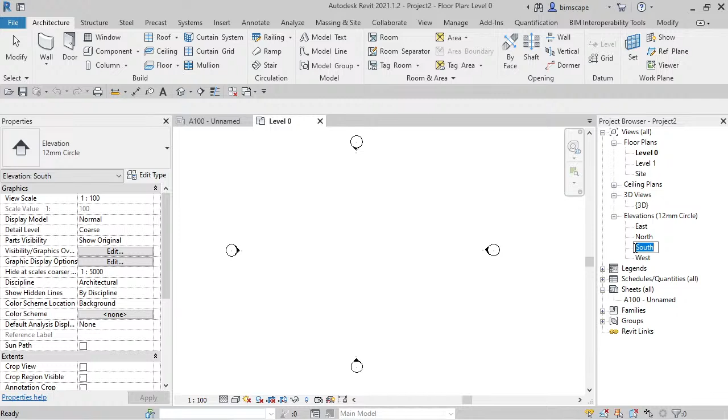Obviously, being in the UK, I'm working in metric units, so apologies if it's a different unit you're used to. A lot of people have asked for imperial units in the courses. It's something I definitely would consider. You can appreciate it's quite a lot of work to do a second set of videos with different units and for the PDF ebooks, but I'm definitely not ruling it out. It's probably not quite a priority at the moment, but I know many people around the world are working in different units than I am.

So let's - I've got to keep remembering to check down at the chat box. 1 p.m., just short notice. Oh, apologies, Lou. Oh, hello, we got someone from France. Fantastic.

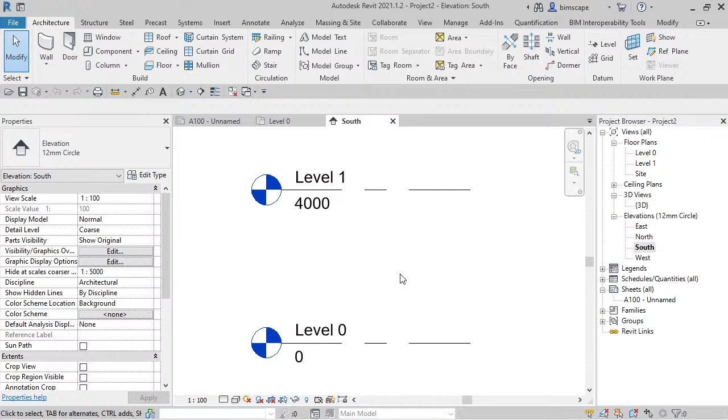Right, okay, so levels - absolutely crucial in Revit. You can see here in the Autodesk template that they give you 2 levels to get you going, to get you started. So you've got something in there, but you're almost certainly going to want to add additional levels.

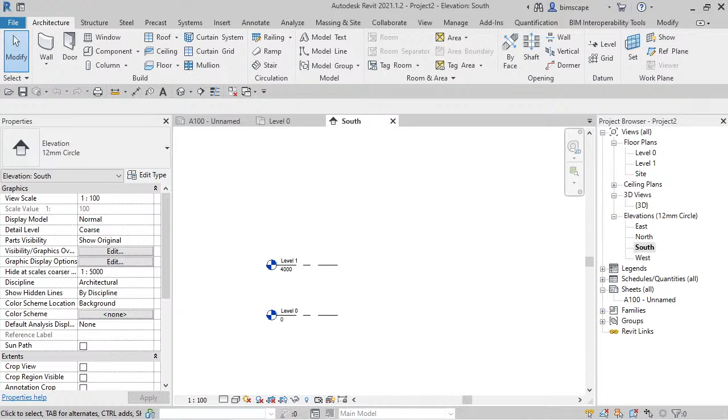Oh, thanks, Zane. Brilliant. Enjoy. I really appreciate the feedback.

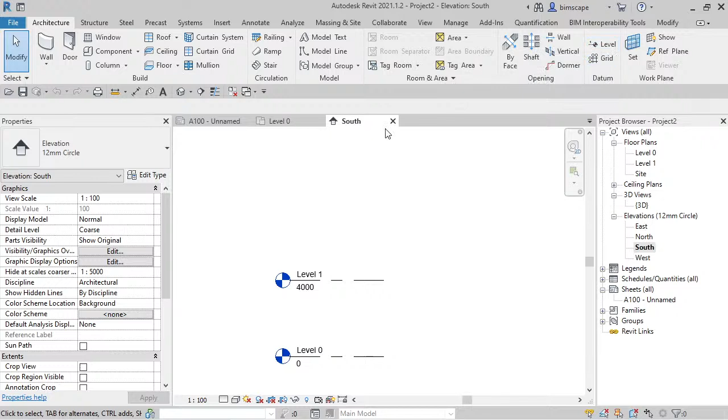Now I'll just say again, you do have to be in a side-on view, so either an elevation or a section, because levels are always horizontal. So if you're in a plan view, you're not going to be able to see where you're defining that level, and that level menu we saw before would be grayed out - it wouldn't allow you to do it.

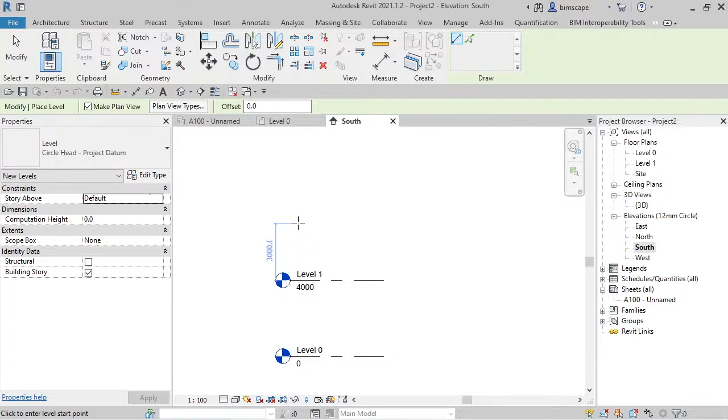So let's go and add an extra level. Notice how the alignment line helps you set these out. Now what you're seeing here is just the graphical aspect of a level. The datum we create, the plane, is infinite in its operation, so we can place objects anywhere at this height - it's not limited to just this line. This is just a graphical representation.

So you can imagine if our elevations here, we might find it useful to have these at the side to see the different heights, or we could turn off the visibility of those, but the actual plane, the datum, would still be in there.

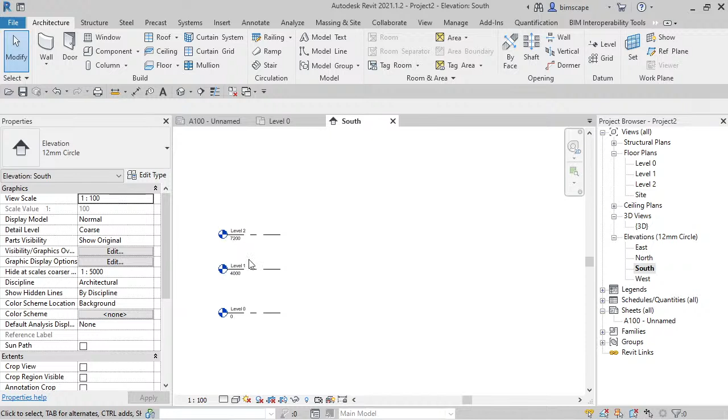Okay, so let's go through the aspects of this. We've got the height there. Now that is based on the project coordinate system - the Z coordinate - so we can select a level and just click on that value, and put another one in, type it directly in.

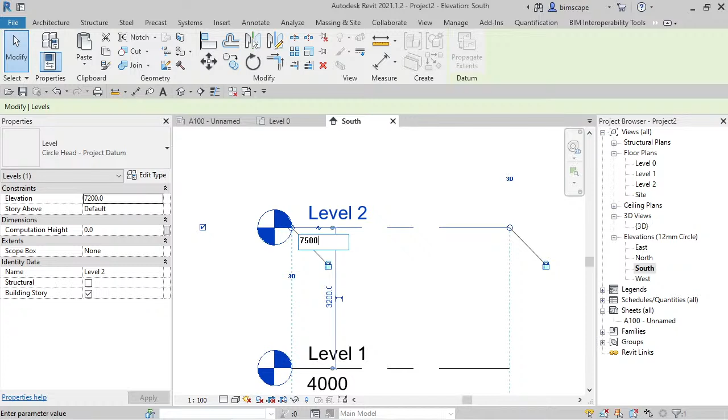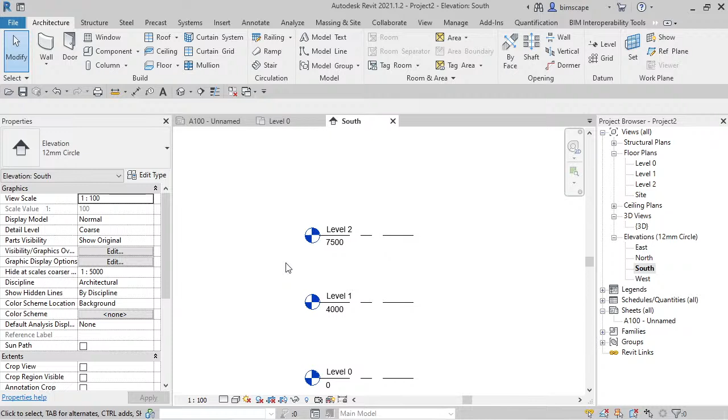That goes up there. Above the line we've got the level name, so you can see that Revit has automatically named these in sequence as we've added additional ones in. Thing to note there, it does name them just in the order you put them in, not necessarily in the height order. So if you go and add another level down here, it would be level 3 - it wouldn't know to make it 1.5 or anything like that. It's just the order you put them in.

I'm just going to keep checking the chat box. So, 10-story building, how to apply general notes to multi-floors.

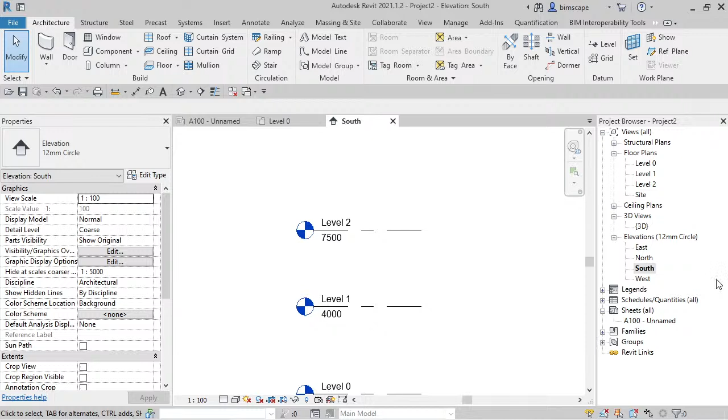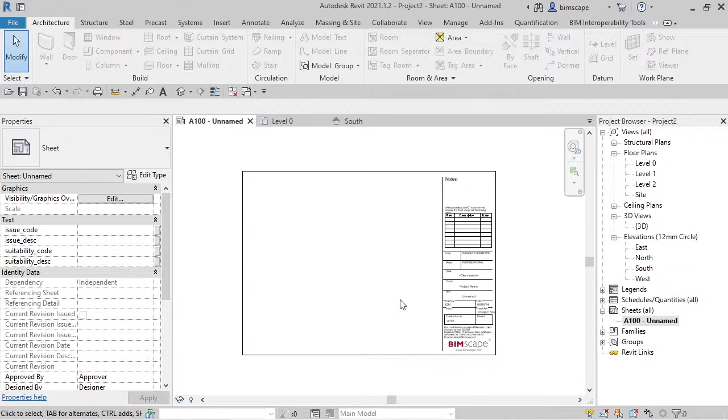So you're not typing this - right Ken, that's going to be a legend view. I'm imagining what you mean there when you say notes onto a sheet. So let's flick to a sheet view - there's my sheet, a little A3 sheet. I'm imagining what you mean is if you've dragged different floor plans onto different sheets, and you want a standard set of notes - I'm assuming that's what you mean - then that would be a legend view. Legend views, it's sort of obvious in the title really, it's for legends and standardized notes, and it's one of the few view types that you can actually put the same one onto multiple sheets. It's fine with jumping around with questions or whatever - that's the purpose of this live session, exactly what I intended it for. People can just ask what they need.

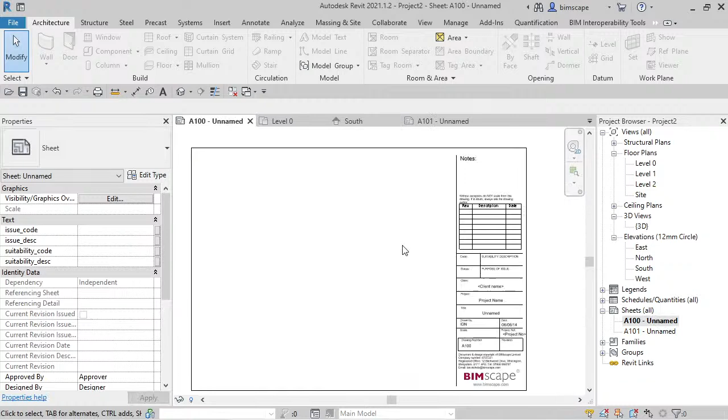So, for example, if I drag that level 0 floor plan and put it on there, I know there's no building on, but it's allowed us to put the view on. If we go to the second sheet and try and do that again with the level 0 floor plan, we get a warning it already exists and it's already on sheet A100.

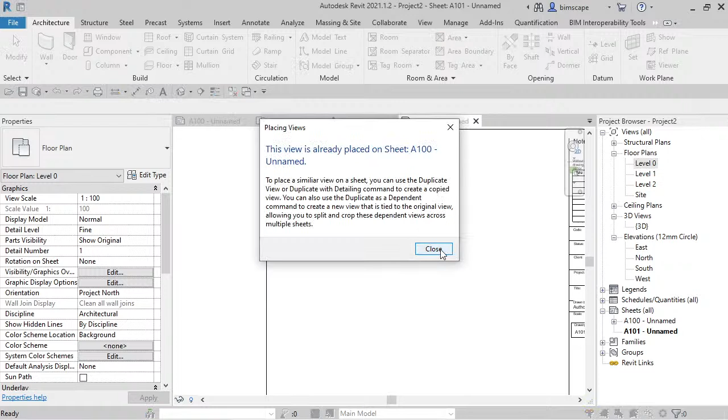That is because when Revit starts to auto-populate the markers for elevations like this and sections, so all the reference bubbles, it only makes sense if you've got the corresponding plan on one sheet and its elevation or its section on another, so it can sort of cross-reference between the two. If you could put the same plan on multiple sheets, how would a ref on a section, for example, know which other sheet to refer to?

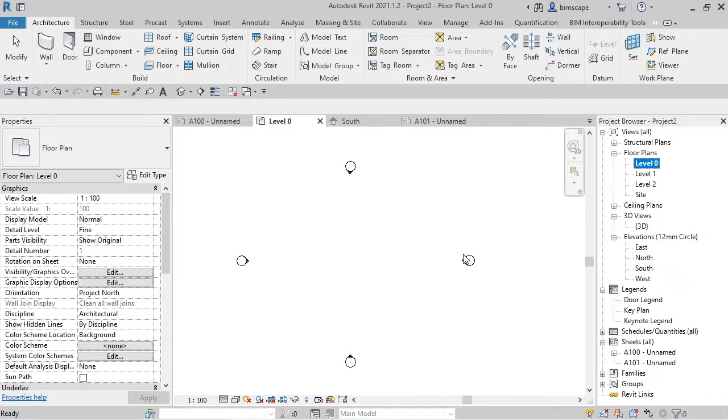So going back to your legend views, because it's a standard note, you can actually, in fact we've got it there, I've got some legends, you can drag those onto as many different sheets as you need. So that's where you'd create it. Let's have a look down here. Things like the wall construction with a leader. Oh right, okay. Be view specific 2D. I'd have thought the wall construct. Right, now that's a really good point. The wall construction. Let's have a look at this.

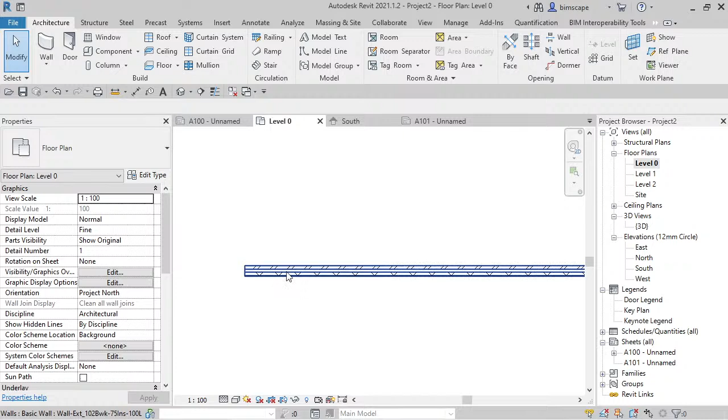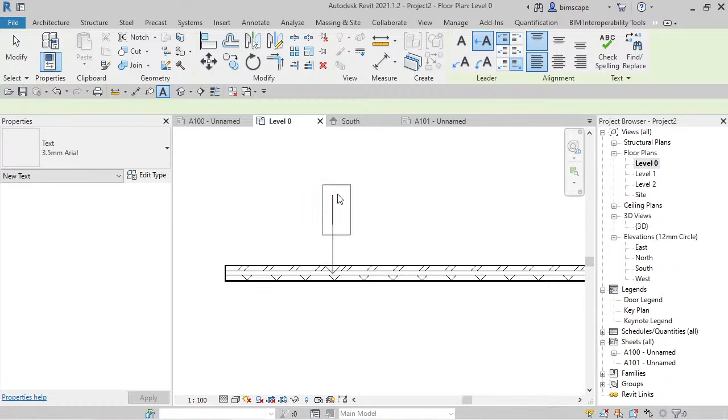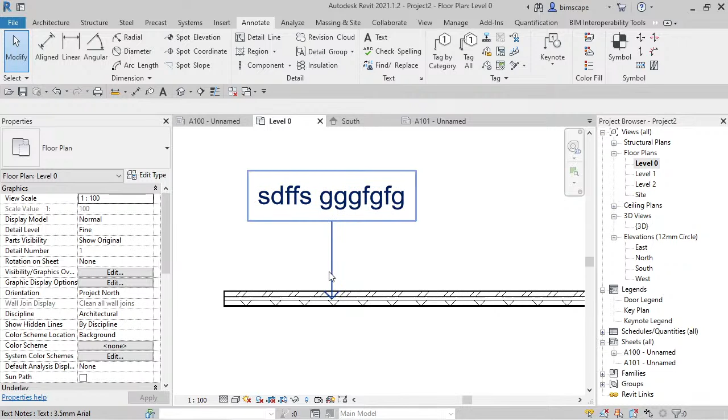No, yeah, I think you've beat me to it there, Ken. If it's to do with a wall construction or any element properties, then you need to be having a tag to pull that data out of there. What you do not want to be doing is going to annotate text. I mean, if you come from AutoCAD, you're going to be tempted to do that. Forget the garbage I'm putting in here. It could be anything, but you don't want to just be putting a piece of text with an arrow pointing to an element, because in Revit this is just dumb 2D text. It doesn't have any actual relationship in the database with what it's pointing towards.

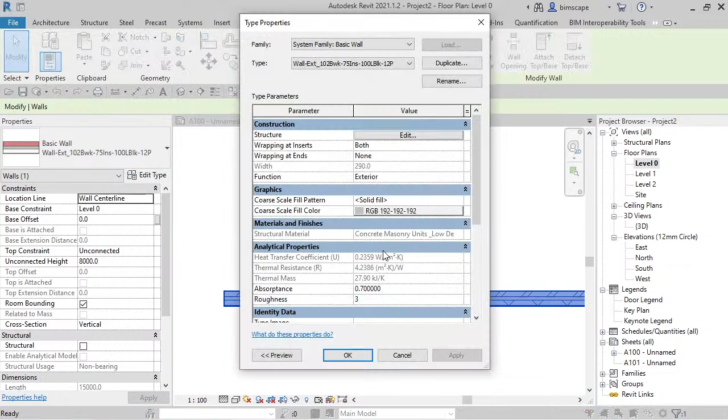What you need to be doing is selecting your element, and you need to be populating the project information, or that element information, in here, probably down at this level, the type parameters. So we're really talking about the whole BIM, building up a building information model where the information, so in what Ken was asking about, the build up of the wall, the layers, the thicknesses, etc., they're contained within the element itself, and then in Revit we use tags to actually pull that information out and make a little note next to it.

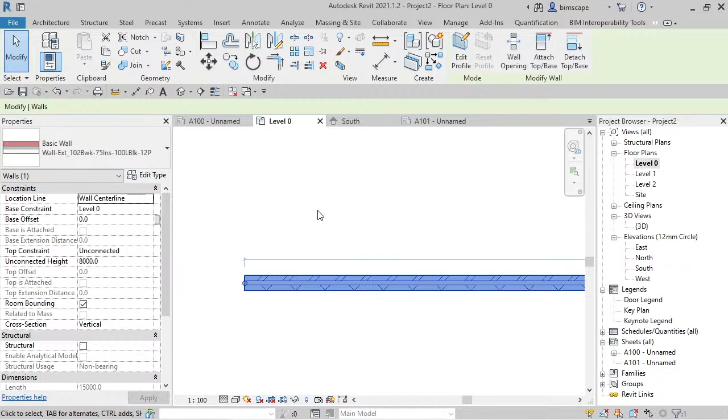Let's have a look. So I'm just keeping an eye on the chat box on a different screen here. So yeah, we'd go to tag by category. Now we've got a question mark there because this standard tag for this wall is obviously pointing at a parameter in that element that doesn't have any information against it at the moment. But the real power of tags is that you can configure them to display any information about an element that you need. So let's just go back to that piece of wall.

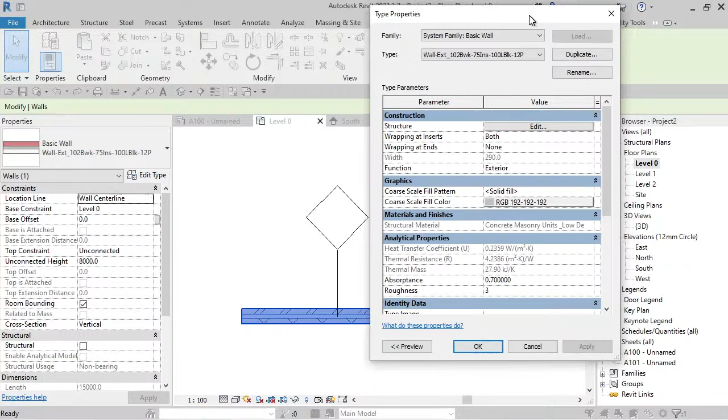Edit type. So in fact, if I place this over here, we've got two levels, a hierarchy of parameters to do with any element in Revit. We've got the instance parameters here. So for that particular piece of wall that I've selected, those parameters are particular just to that one selected wall. So we could have a whole building envelope, all of the same wall type, and we can change any of these here for just that one piece of wall. However, the type properties in here, anything we change there will change all the elements of that wall type in the model, regardless of whether I've got them selected or not. So just be careful of that.

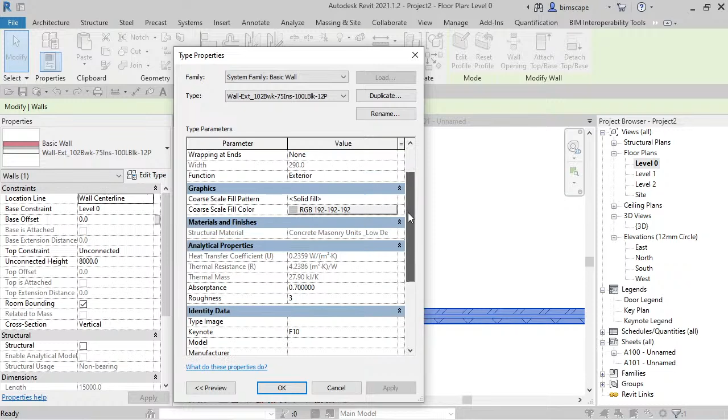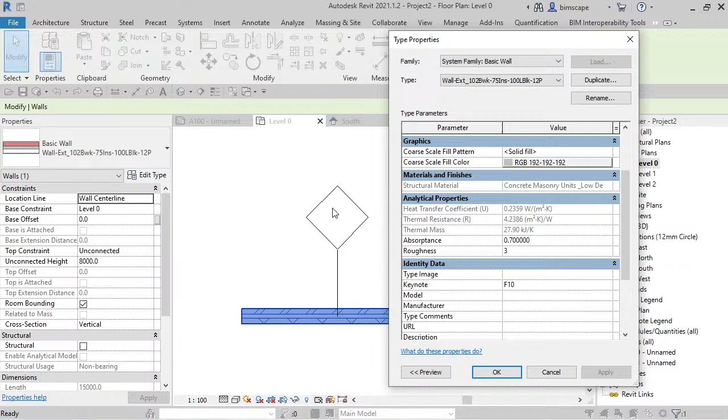But the reason I brought that up here is any of those properties there, or the ones listed here, you can set your tag to pull out those values. So if you wanted, I don't know, a drawing showing, well, any of this really, the manufacturer, or some comments or a description, you can configure the tag to drill down and pull out any values it's found. And that's why we're getting that question mark. This is pointing at one of these which doesn't have any information in at the moment. But you can go and change that yourself.

Let's have a look at exactly how it actually creates some parameters in it.

same as if you used a pen or pencil. Well, in Revit, the main mindset jump is that, for the greater part, you're modelling your design, and you are letting the software produce the drawings from it. So if you start with that sort of mindset, you're building up this 3D model, you're populating those different elements with the information about them, and then you're using the tools in Revit to automatically generate floor plans, sections, 3Ds, and to add notes from the information that you've embedded against the different elements.

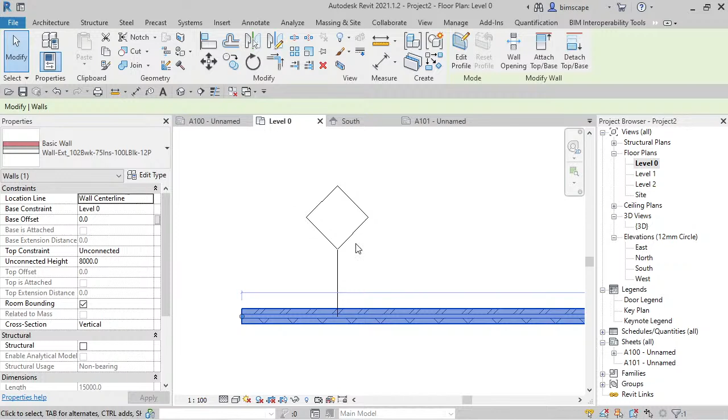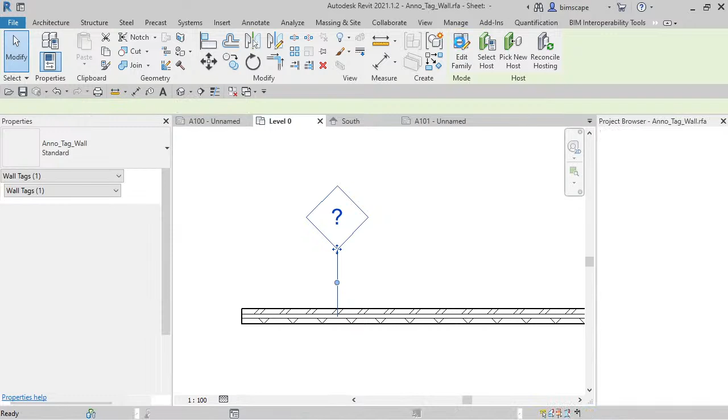Okay, so I won't spend too long on it, but just to show you editing those tags. Now, tags are a family, just like all the other component families in Revit, which means they can be created and edited with the family editor. So, edit family. This opens up the family editor. You might have come across this part of the program either intentionally or unintentionally. If you double click on a component family like a door or window, it will open up the family editor for editing.

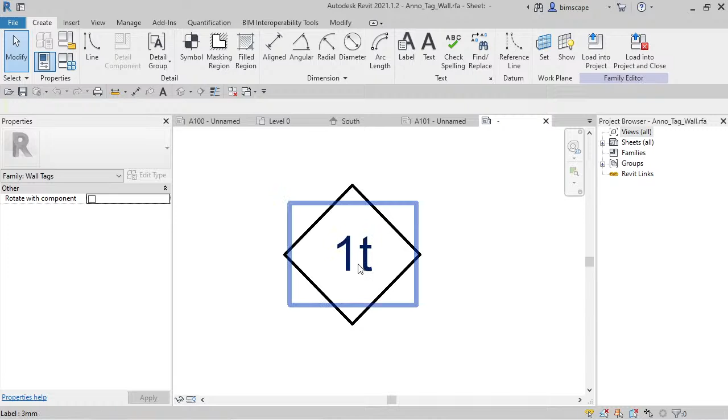So if I pick the label there, this is where, in the case of a tag, you set what data is pulled out. So there's that list of parameters. Now, because it's a wall tag that we're editing, you can see that's selected there, so the parameters are only from the wall category. You can see there the type mark; if you feel that's a unique reference for that type of wall, that's what this tag is set to display.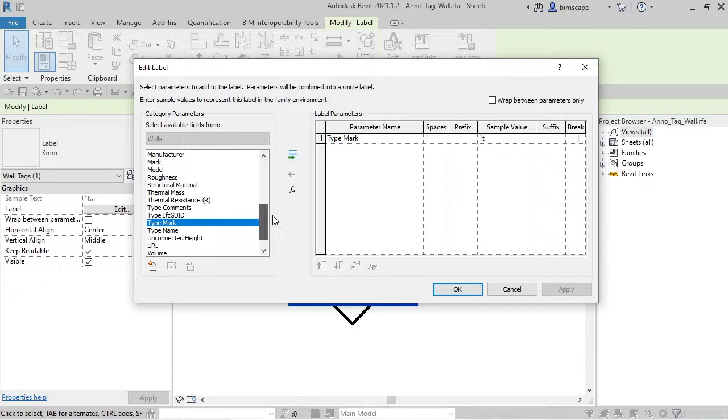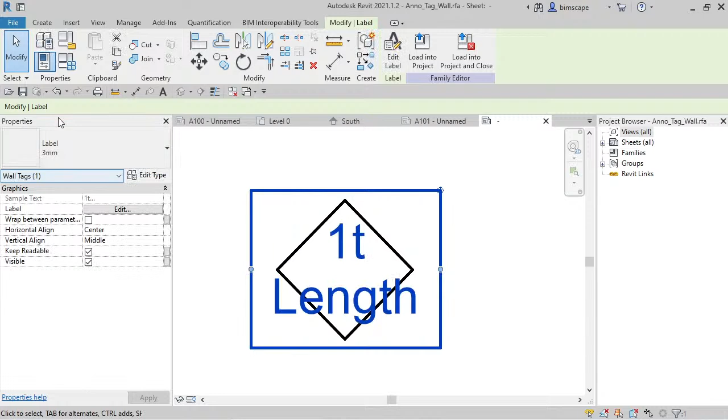But there's nothing stopping you. Let's have a look. Let's choose something. Length. Add that in as well. And you can have more than one property or parameter in the tag at the same time. Put that break on so it starts a new line. Just widen that a little bit. Now, obviously, if I was doing this for real, we'd change the box and all that sort of stuff. But just to give you an idea.

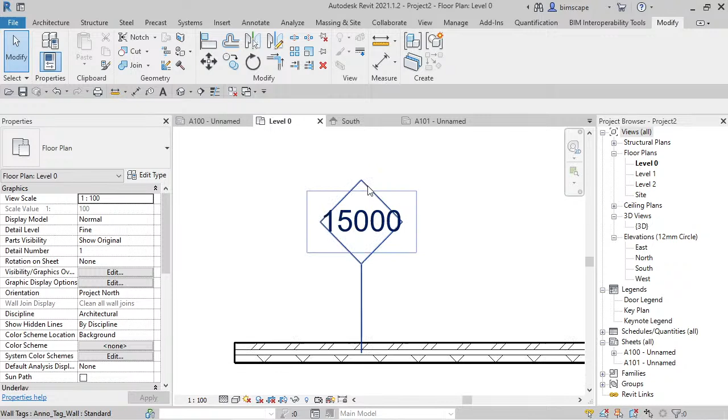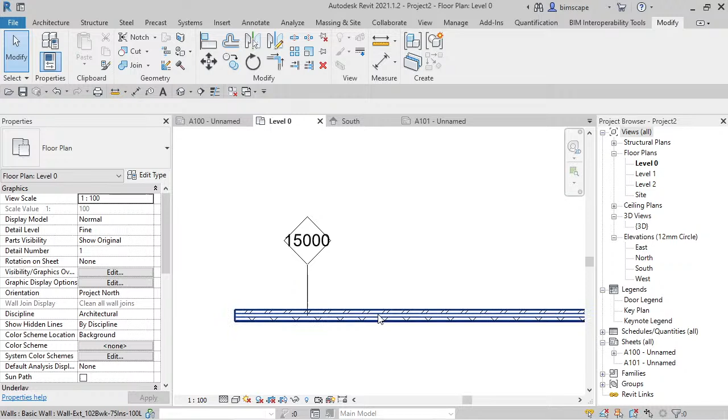Won't save it. We'll overwrite the existing one. There you go. It's still not finding the type mark because we haven't added it in, but it is displaying the length. So that might be really useful to somebody. You've got a drawing which has got all the lengths of walls on. I know you could normally dimension it, but the principle I'm trying to get across is any of those properties, instead of you, like in AutoCAD, measuring this and putting a little text note on.

So why is that important? Well, exactly this reason. You go and change the length of the wall, it updates instantly. If that was a piece of text, obviously we've got to go and make sure everything's coordinated. So a huge part of the power in Revit is that it keeps a lot of your information coordinated, so the plans always match the sections, the elevations, etc.

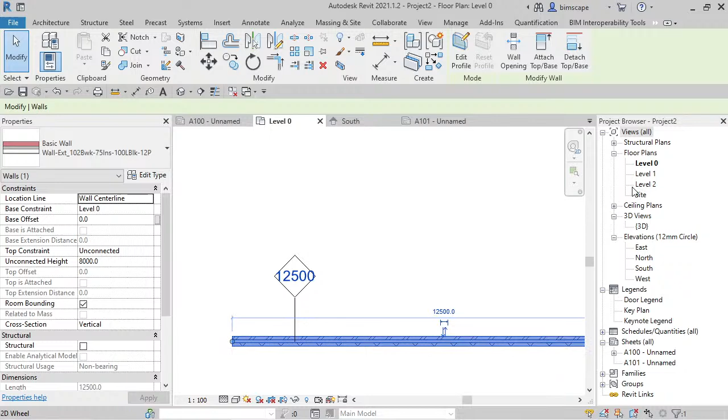Okay, where were we? We were on levels, weren't we? Let's go back here. So we've got a few levels in our project. You should be using levels as far as possible to control the height of elements.

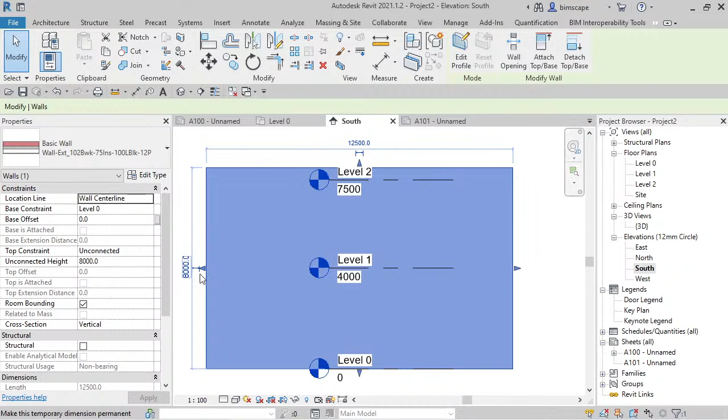So for example, walls. If we take this wall, it's starting at level 0. So if we look over at its properties, base constraint, level 0, and the height of it, top constraint, currently that's set to unconnected. That term unconnected just means it's not controlled by a level or anything else like a roof it might be attached to. So it's unconnected, and if it is unconnected, as it is here, we have to tell it how high it is, else Revit's not going to be able to display it. So that's what the unconnected height parameter is below it.

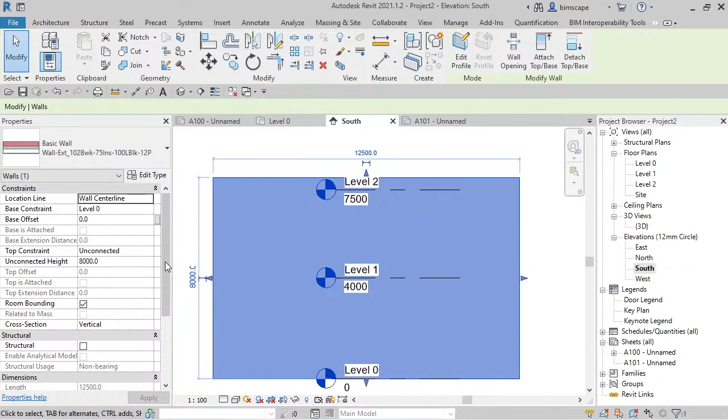And I would suggest that you minimize the use of unconnected heights. Again, it's the same sort of debate as we just saw using dumb text. If you have unconnected heights, so you've manually gone around and set the heights for all your walls, if you need to make a global change, so all your envelope of your building needs to come down by a couple of hundred mil, you've got to select all those walls and go in the properties and change it here.

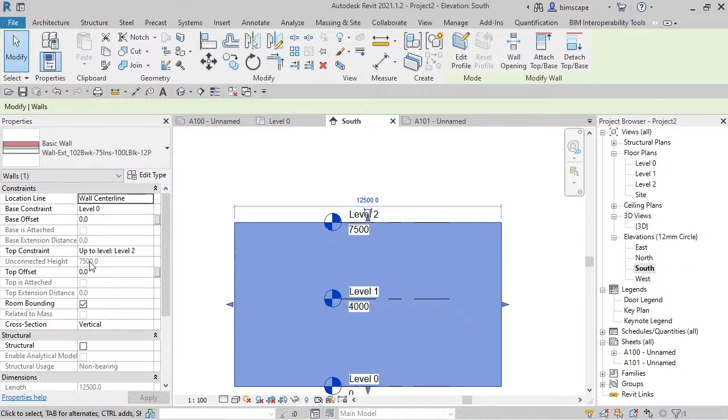Much better is to tell it that goes up to level 2. Reselect it. So you can see there, top constraint up to level 2. The unconnected height is now greyed out. You can't manually put that in. You don't need to, because it's controlled by the level. So what you can do now, if I use the tab key, select the level. Let's just move these over a bit. Pick up that open circle, that's the grip. Let's pull them to the side of the drawing.

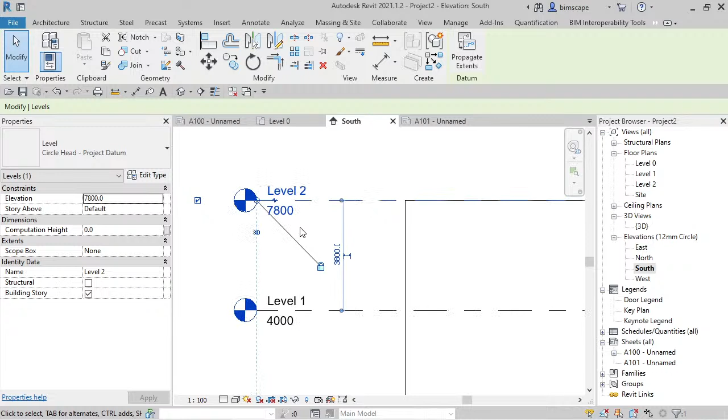So now if you're developing your design and you think actually the eaves here need to be a little bit higher, you can simply drag that if you want to, or just type in the new value, and you can see the wall increases.

So I'm just checking this chat box. Hello Lydia, beginner. You're very, very welcome. Glad you could join us. This is aimed at the beginner sort of level, and I'm just tackling almost random things here with the levels and walls and whatever. But if any questions. Alexander from Mexico.

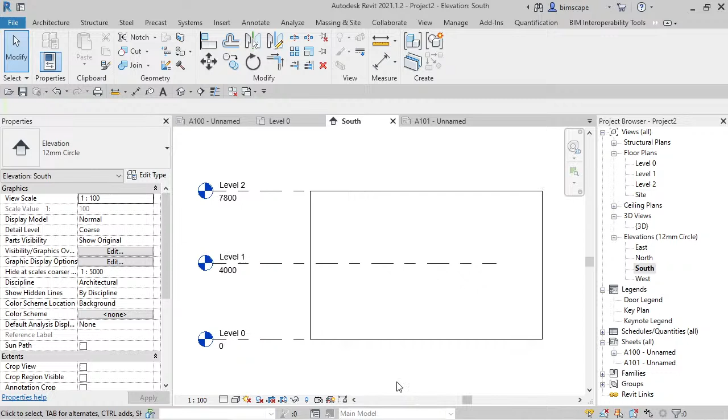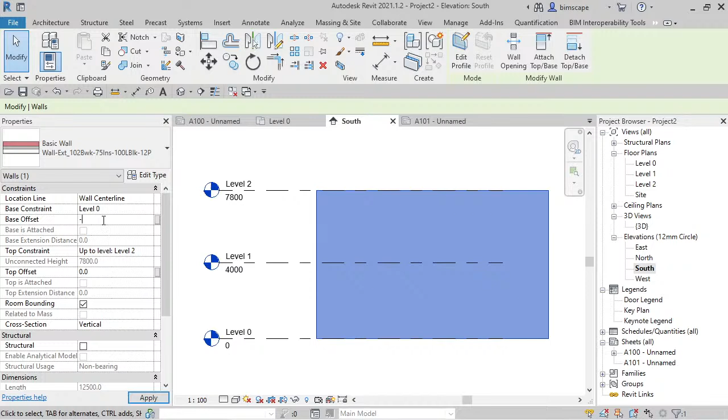Now what that means is, let's take the base for example. So we're looking at this wall in elevation. The base starts from level 0, so base offset is 0. So no override, if you like, is applied to that figure there. So it is from that level. So let's put in minus 500. See what happens. So the wall goes down by 500.

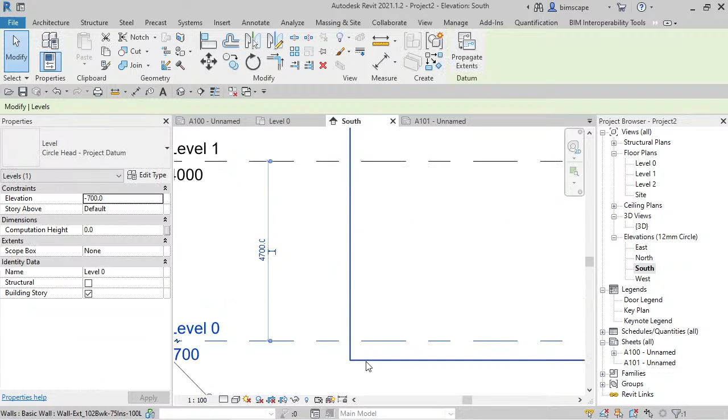It starts 500 below whatever height level 0 is at. So it doesn't matter if we now lift level 0 up or down. The wall always maintains that finite distance of minus 500 down from it. If I'm honest, I've put this in some of the other videos and the ebook, I'm not a big fan of these offsets here, for the simple reason is,

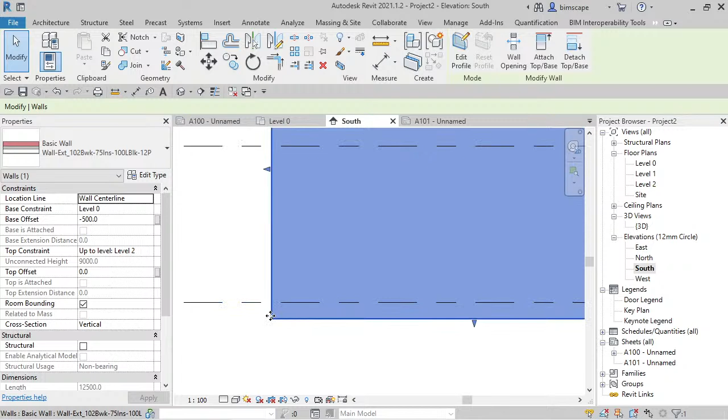if you take over this project from me, so you're in an office, unless someone tells you, you're going to be wondering why that wall starts 500 mil down. It might be obvious to you. I might have a very good reason for why it does, but it's just not very legible, I don't think. Typically you do that to go down to a foundation, and you want this to go, let's say, 900 mil below ground level to the top of your foundations.

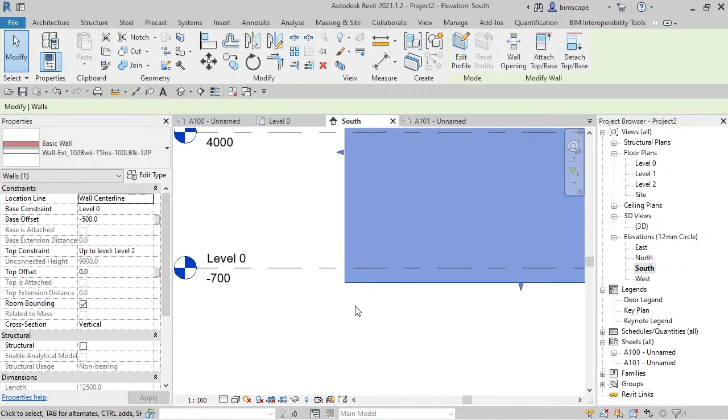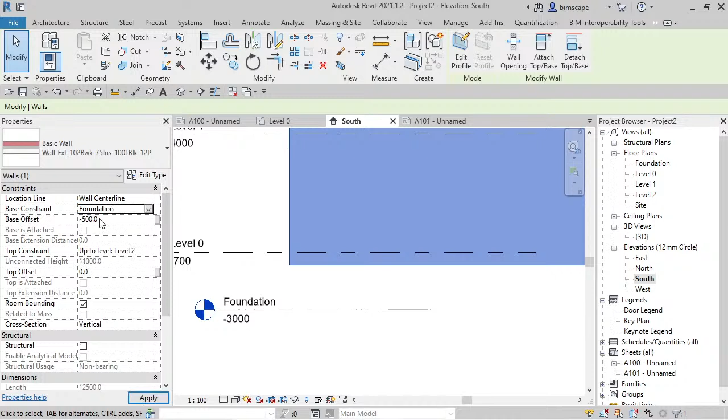Much better would be, I think, to have a level and call that, I'll spell it, something like top of foundation or whatever, and then set that to actually start up there with a 0 offset. To me, that makes the whole model more legible. I'll come back to that.

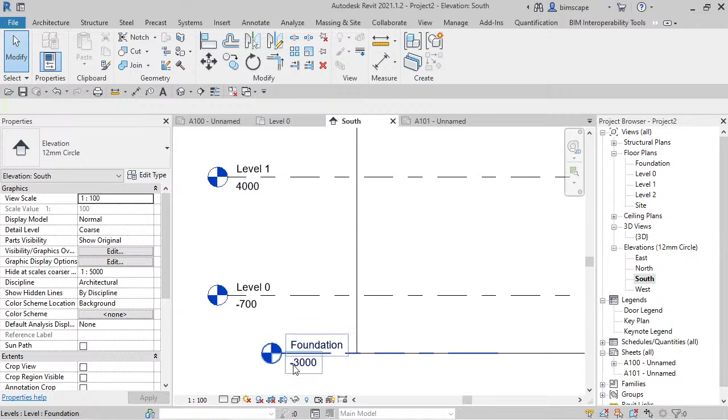And it's what we just said about the top of the wall. If we think actually the foundations need to be a little bit deeper, we can just go and change that there. Another 200 mil, and all the walls go down. We probably have got foundations whose top is controlled by this. So what we're doing all the time in Revit is trying to make our life easier in terms of reading the model and also making adjustments to it.

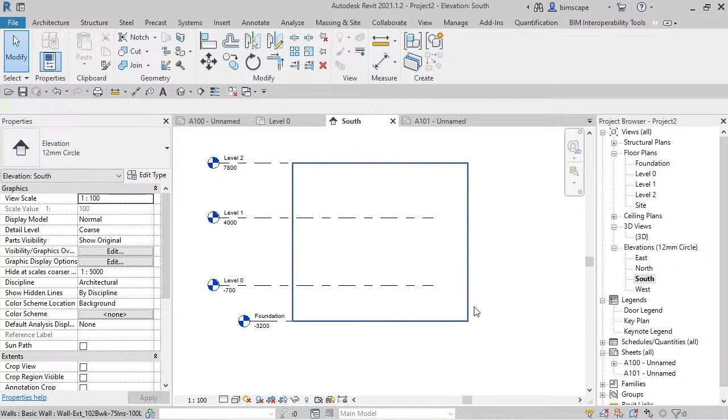You know, the engineer comes back to us and tells us we need to lift some of these things up or down, rather than going to the individual elements. I know we can group them and make selection sets, but we've still got to make sure that we select all those different bits and change their heights. It's easier to have them controlled by the levels, and then just make adjustments knowing that all those elements change accordingly. Now, this is a very simple example.

Imagine if that was an envelope all the way around your building, internal columns, floor levels, ceiling levels, even maybe window heights tied back to certain levels. We can suddenly start adjusting hundreds of elements very quickly just by tweaking the heights of these levels.

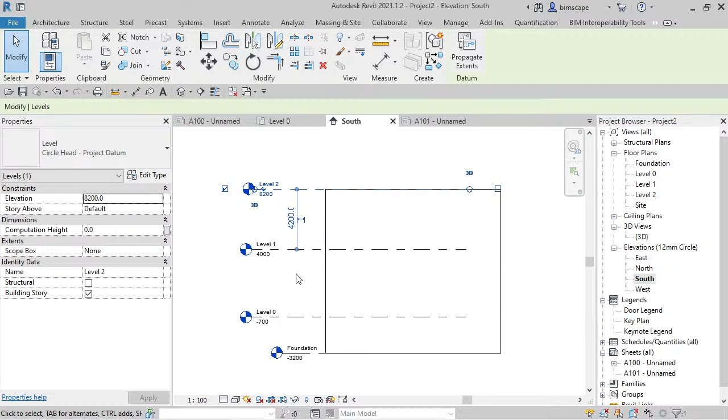Right, okay, yep. Let's have a look. Ken wants to see the types. Sorry, walls even. Let's get back in here. Okay, wall. Just leave that on a second there for Ken. Just scroll down.

That, Ken, is just the Autodesk template, the standard template out of the box for 2021.

So I was just having a sip of coffee there while I talk.

Now, starting, I think it was just this year with 2021, for the first time, and this threw me a little bit because I didn't read it anywhere: up until very recently, when you installed the new version of Revit onto your machine, okay, what I'm going to say now might address it. Up until now, when you installed Revit, obviously it installed the program, but it installed all the default libraries, and it would pick up on your localization, where you were in the world, and put your language packs and whatever, but it would include the component families, so all the generic doors and windows and columns you get from Autodesk, just to get you started with some components.

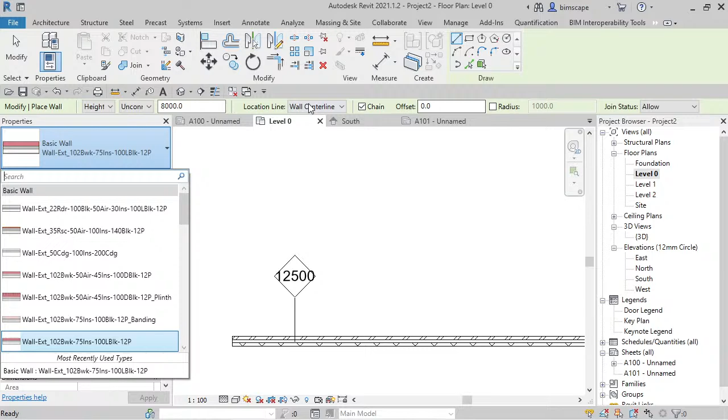With 2021, it obviously installs the program, installs the basic template for construction or whatever, but it doesn't install all the component families. So you go to hit window, and you go to load family, and there's no libraries there. What you've got to do now, and I'll show you here, and I've done a video, you'll find this in one of the fairly recent videos I've done, is now it's on insert, I think.

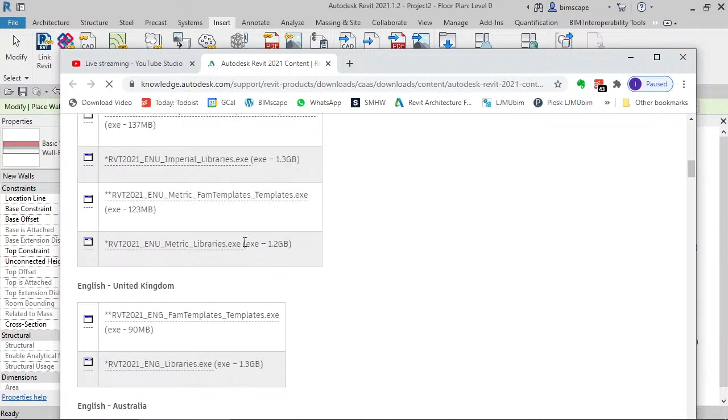Yeah. So on the insert menu, now you've got this Get Autodesk Content. Let's bring that up. Autodesk Revit 2021 content, and you go down and you find your component families. So there you are. That's the one I had to install. So you'll need your family templates for your family creation, and also this is your main library. So these are all your extra doors and windows that Autodesk supply.

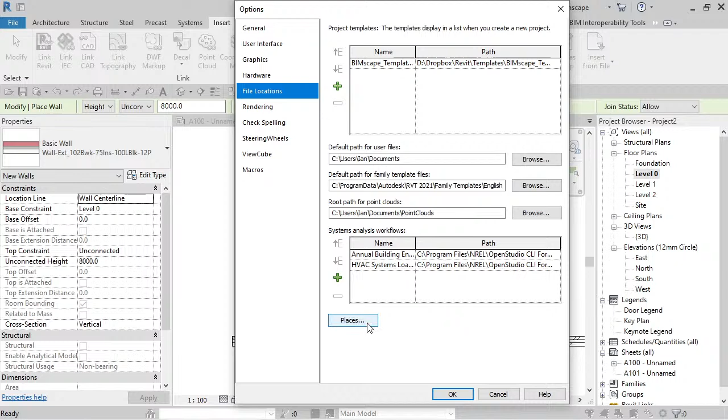So there's two parts to this. You've got to download that. When it's downloaded, you need to extract it and then run that. That installs and unpacks those components onto your hard drive. You've then got to go and configure Revit, and this is the other bit. You've got to go and tell it where those are. So you've got to go to File and Options, File Locations, and go down to Places. I'll just do this again slowly in a second, give you guys a chance to follow. Metric library, tell it where those libraries are. So let's cancel out of that again.

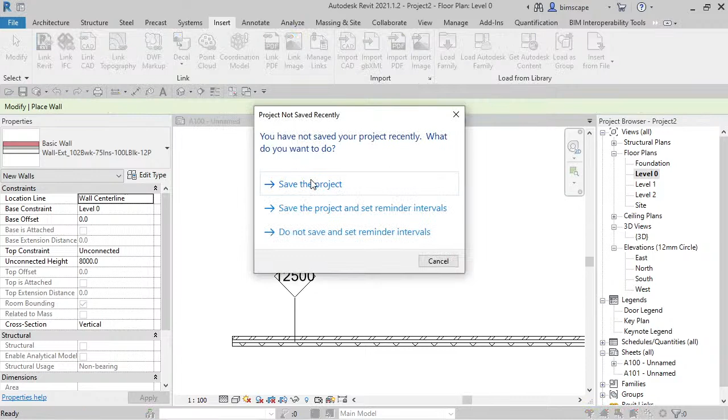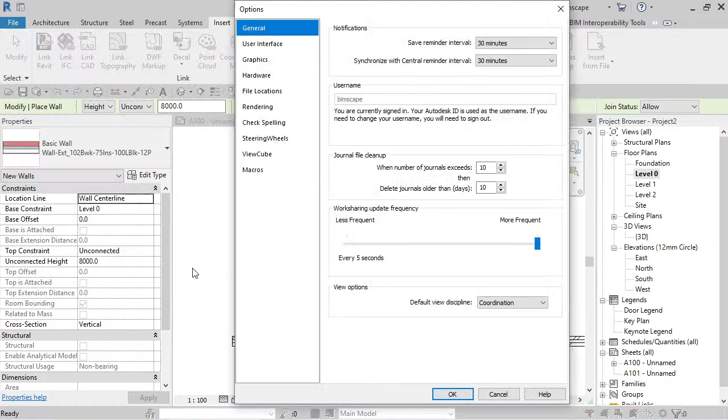So to get the content, Insert, Get Autodesk Content. That'll open up your web browser. That's just telling me I haven't saved this for a while. It'll open up your web browser. Go and find the library that you need for where you are. Download and install that just as you would any other program, and then go to File, Options, and you only have to set this once, and once it's done, that's it. And then File Locations and Places, and make sure, it might say Imperial Library, whatever your units, but it knows where to find that library.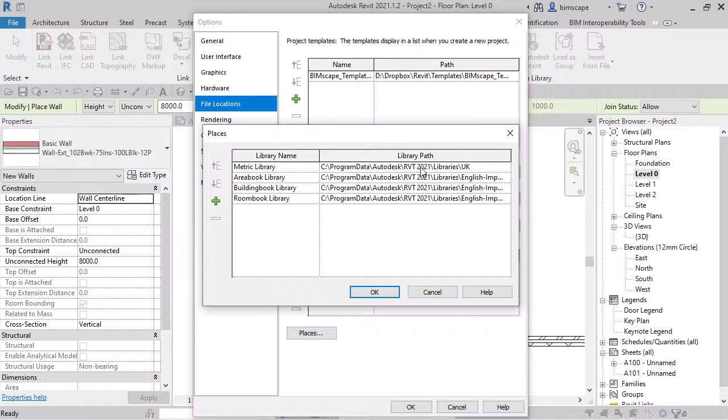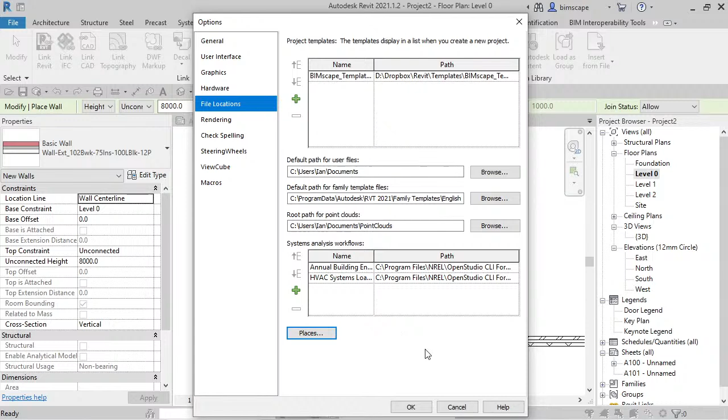Now it will generally install it in Program Data, Autodesk, and then whatever folder is named the current version of Revit, and that's where it'll find the current libraries. Don't point it to old versions of your libraries, because one, they might be outdated, but two, Revit's got to update them because the file formats change each year. Although most of the objects are probably exactly the same, it has to upgrade the model, and you'll get that every time. It's just a bit of a pain.

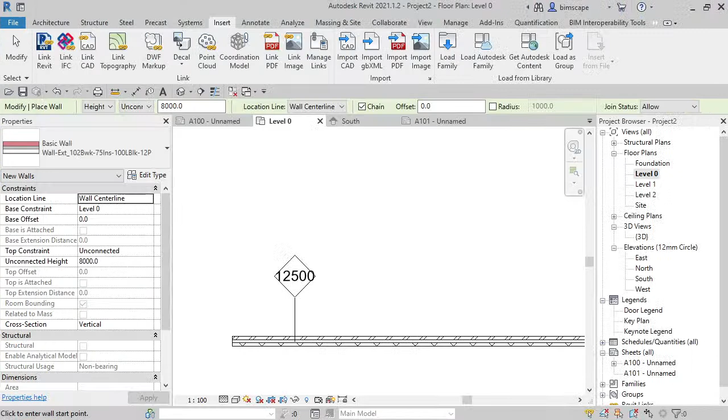Okay, let me, right. Just going to, sorry guys. Let's move that back there. Okay. Move that back down. Right. So I've lost your, bear with me a second. Lost the chat box. It's when the browser opened. It's going to come back now. Right, we're back in business. So I've got the browser on a second screen. Here we go. Right, let me catch up with these. I lost what's happening since I was rabbiting on. Let's have a look. Okay, welcome to the people who've just joined. Okay.

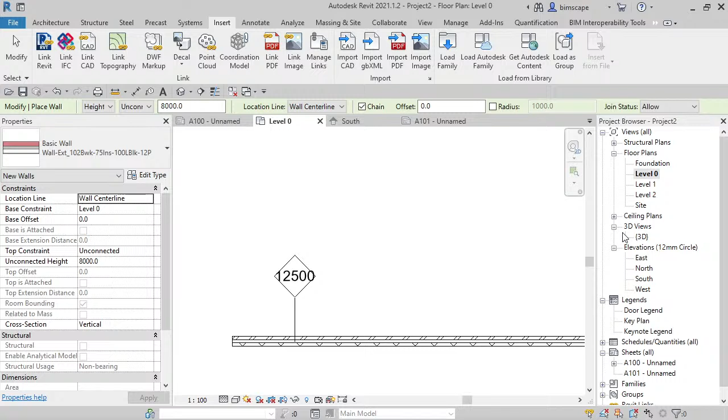Here we go. If you're modelling walls like that with your levels, how should you stack them? Oh, right. A good question from Ken. Let's go back. So what Ken's asking is, say it's a 3-story house. You've got ground floor, first floor, second floor. Should you do your walls in story height? So a wall that goes from the ground floor to the first floor, and then a wall that goes from there to there.

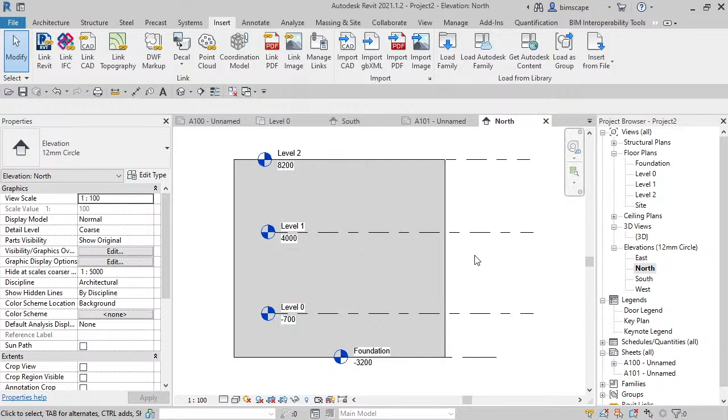Personally, I would just do it as one. You can still place your windows. So if you're on level 0, which is basically the ground floor, and you put your windows in, the windows will still be referenced to this level. You've got control over your window heights. I don't see any advantage of splitting the walls. The only time you would do that is if the wall changes style. You know, it's rendered at a certain level.

And brickwork below or above, that sort of thing - that's where you would possibly use stacked walls, which allow you to create a wall type that has different build-ups as it goes up its facade.

I'd follow the rule: model it in Revit as you would build it. The problem is if you do it in story heights, you get visible lines, and you have to use techniques to avoid seeing those horizontal lines between the elements on the elevation.

You can get into trouble - imagine you've got a stair behind here with a landing, and a window on the landing that spans between two walls. That can cause problems because it doesn't know which one to host into, and it won't cut the other. So at least if you've got one decent wall all the way up, you've got no problem putting your windows into it. So let's carry on reading down there.

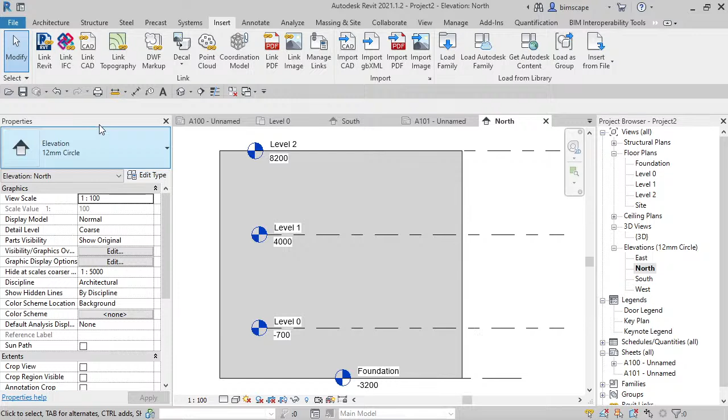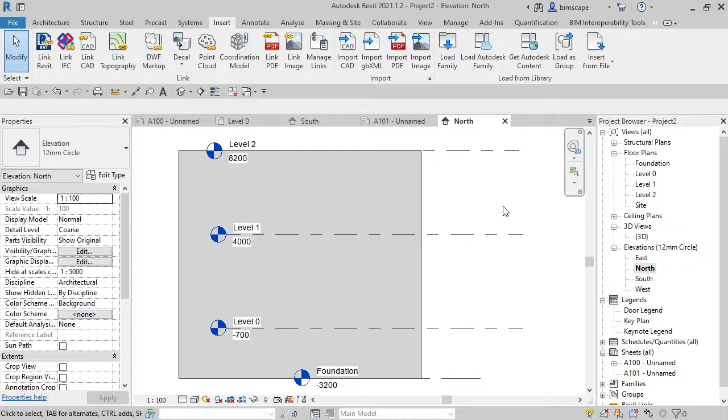I'm showing you the whole interface here with the properties palette and the project browser docked. But quite often, if it's a large model, I'll take those off screen, and they'll go onto my other monitor, and I'll do the same with the project browser. Just for ease of following along, I'm doing single windows here. We've got tabs now that have been around for a few years, but once you take those elements of the interface onto a second monitor, you've got a lot more real estate to see your drawings, and you can start tiling them, having a plan, a section, and a 3D all up at the same time.

Monitors have plummeted in price, like most computer hardware. So all I'd say is, if you can get a second monitor, it makes Revit a lot more usable and enjoyable, because you can get some of these interface elements onto a second screen. I think it was about 3 or 4 years ago, probably longer, that you could take these drawing windows onto another screen, whereas before people were doing funny things like stretching the application window across two monitors, and the menus would get lost in between. But there's no need to do that now—Revit fully supports having different views on different screens.

Let's have a look down here. Okay.